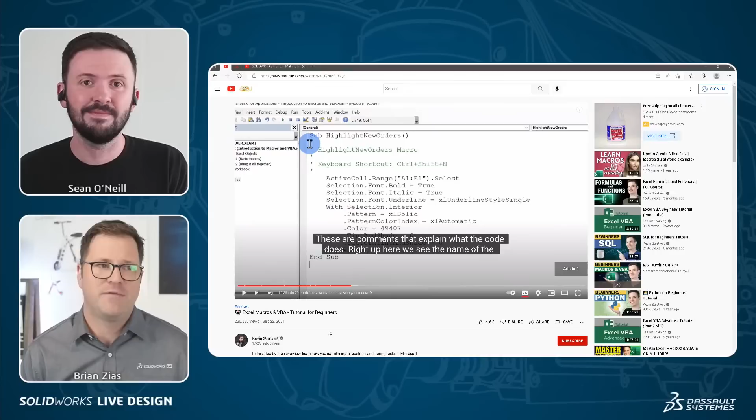And you and I were talking a little bit yesterday, you could use VB.NET, you could use C#, C++, I believe, but the majority of us being maybe new to this or not computer science majors, we're mechanical engineers, Visual Basic should be approachable. So everything you're going to cover today, and you recommend people start with Visual Basic, VBA, Visual Basic for Applications.

100%. Quick shout out to this channel. If you have no coding experience at all, and you're like, okay, I get it, Sean, I'll start with VBA, I would still recommend just trying some things in Excel. This is less than an hour of your time. Just YouTube this video: Excel macros and VBA tutorial for beginners by Kevin Stratvert. He has a lot of videos on VBA that are Excel based.

It's segmented out, but even just doing simple things like mathematical operations and working with strings, basically groups of text, will get you in a very simple interface. It's just cells on a sheet, right? It'll give you a much cleaner way forward into working with the SOLIDWORKS API. So if you have no coding experience, start there.

You talked, Brian, about how do I know which API to call? There's a variety of methods. One way, and we'll look at this in a bit today, is what's called the macro recorder. Now, the macro recorder is not foolproof. It doesn't understand intent, but in certain cases, if you record a macro, which essentially means you press record and you do something in SOLIDWORKS, let's say you select a plane, make a sketch, extrude a cylinder, you press stop, and then you review the code.

All right, let's see. Okay. Sorry to shift it out there. All right, so I will make a new macro. First thing it's going to do is ask me where to put it. So I've made a folder here, and you'll see the macro file extension is SWP. SOLIDWORKS VBA macros are always going to be appended by SWP. So I'll go in here into my test folder, and I'll just name this one System Options.

Okay, so that's popped up here. I'm going to drag that over to my primary so you guys can all see. So a couple things just to start. You'll see it basically gives you this little bit of placeholder text. So it says dim SWApp as object, which we'll talk about. And then sub main, a little bit of text in here, and then end sub.

So essentially, just think of sub right now, especially if you're not looking to be a master programmer in the next half hour, as the place where the action happens. Basically any code that's going to run is going to run within sub main and end sub. So anything in here is what's going to run.

What we have up here is dim, which is basically saying, okay, this is a variable. Variables are things where we're holding something in memory. It could be a number. It could be the number 26. It could be a string of text, a word, right? It could be the word SOLIDWORKS or the name Sean.

So these are basically just ways of saying, okay, computer, keep this in mind. I'm going to store something in memory that is this kind of thing. In this case, it's an object, or in other cases, it's an integer or a string, right? So right off the bat, I've done nothing but press file new, and we get this text.

So I went into tools options. I speculated there are a few options you might want to turn on or off based on your preferences. But how do you know which calls match which options?

So let's take a look at that. The best way I can answer that is just by going into Google, and here what I'll do is I'll say system options, to take a cue from earlier, system options SOLIDWORKS API. Just put SOLIDWORKS API on the back of everything you want to find. Yeah, you just got to append it front or back, either way.

It's fine, but really what I'm doing there is I'm typically segmenting to the API help in my search results. So you can see here, even in Google, you can see help.solidworks.com English API. I'm always looking for that API appendage, so I know it's not just system options explainers for the average user. Okay, so click on that.

Couple things here, we'll get into this in a second. What I'm usually doing before I do anything, because the search results are Google's algorithm, it's coming up with a particular year. Try to go to your particular year of SOLIDWORKS. So if you're still running 2021, you can go to 2021.

The reason why I say that is because there tend to be new API calls released with new versions. Not always - oftentimes they can proliferate for 12, 13 versions at a time before they're changed. The reason why they're usually changed is because of a change in the software.

So for example, what's new - we're releasing a ton of new content for What's New 2023. If, let's say, Boss Extrude changed in some way, there was a new option added to Boss Extrude, it probably has a new API call. Now it's not to say necessarily the old API call won't work, but it needs a new API call for feature extrusion to accommodate that new functionality.

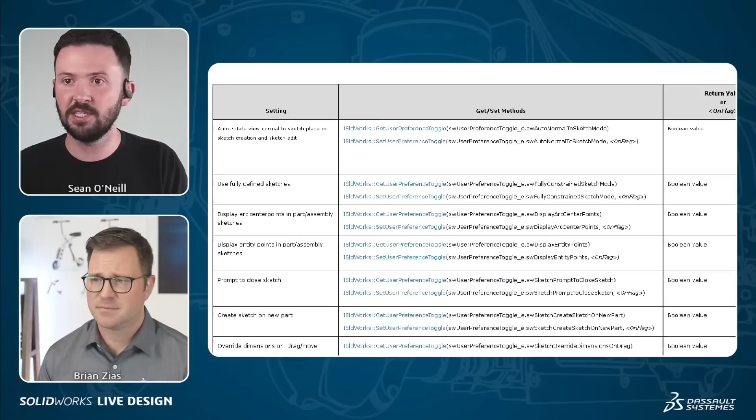And then what it also does is, you can see that each one of these, for the checkboxes, you'll always see it's called - I'll zoom in so you can see a little easier - it's always called get or set user preference toggle. It's a toggle, right? It's a checkbox.

So for numeric values, you would expect to not see a toggle. For example, maximum number of recent documents shown, that's not going to be a toggle - it's going to be an integer. So you want to make sure the type, Boolean, integer, string, you have to keep that correct. You can't pass a string to this toggle button.

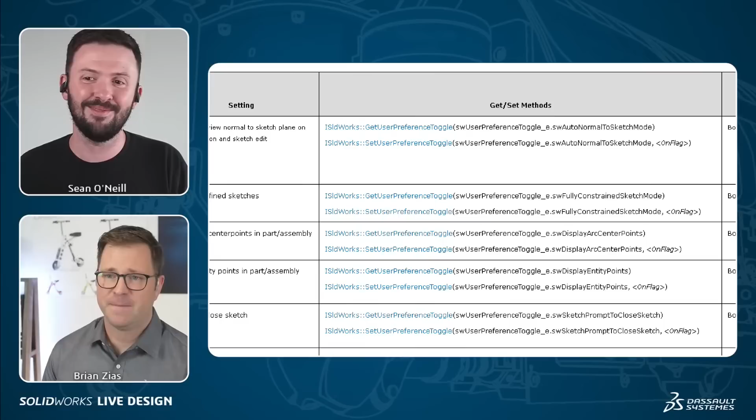It'll fail. When you run it, nothing catastrophic is going to happen, but you should get used to the API compiler, more so just telling you that something's gone a little bit wrong. What is the colon? I can see it looks like a command - get user preference, blah blah blah. Great, that's like a function you can call.

SOLIDWORKS colon - is that a VBA convention? What does that signify? It's a great question because I think it brings an earlier point full circle. If we look at our API code, you'll see this matches through one letter. It doesn't show up when you type out these library and object mappings, but you'll see this says ISldWorks here, where I'm cursoring, and this one just says SLDWorks. So SLDWorks, SLDWorks, and then SLDWorks. Essentially, that's where this command lives.

So it lives at that level of what we call the object hierarchy. Essentially, these do make sense if you think about it this way. So here, in this case, SLDWorks - that's just the SOLIDWORKS application. So we're changing the system options of the SOLIDWORKS application. We aren't changing this per part, or per part template, or per assembly template. This is changing it globally in terms of how this operation happens when you sketch.

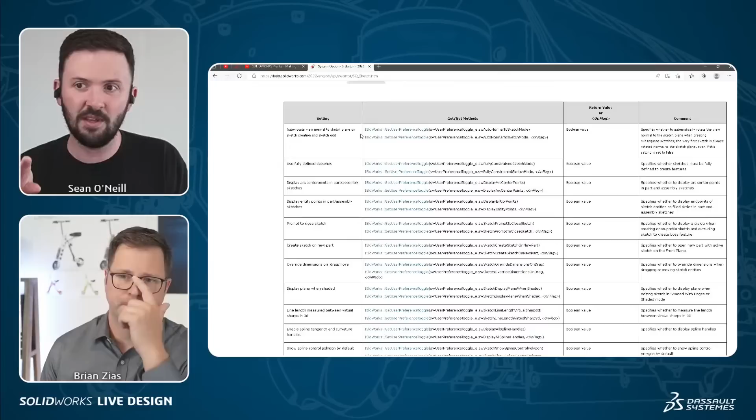So you probably need to know where that command lives, because you might need to call SLDWorks dot part or something to call the right function at the right library.

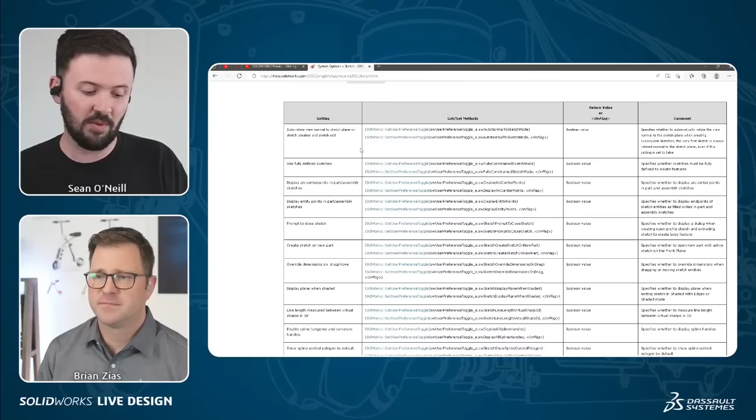Yeah, so essentially you would first establish what we had just done before, which in this case is we've established that there is going to be a SLDWorks style object. It's going to hold the application. Later we're going to assign it explicitly here. But oftentimes, if it's something that deals with a model or some sort of SOLIDWORKS document, we will also see - and again this name doesn't really matter, if you say dim's just telling you it's a variable, you'll always say dim for anything - SW model, that's pretty common syntax.

I used to say in the SOLIDWORKS API course, you can name this flamingos. Doesn't matter. It's just a name that you like, and it has to obey syntax rules in VBA. But try to make your variable names something that makes sense.

But what you'll most commonly see in terms of declaration statements is you'll see SLDWorks again cascading hierarchically, and then you'll see ModelDoc2. I'm thinking of it like you're initializing your variables, so as you call them later, you're setting it to your current application, current model document that you've opened. Exactly, yes, that's exactly true.

So when you think about libraries, you're pretty much saying, I want this sort of area of the library, I want this area of the library as well. I want to be able to work with SOLIDWORKS, and I also want to later work with a model of some kind. Now this won't crash if I run it, but it won't necessarily do anything either, even if I don't use this variable anywhere, because I haven't assigned it to any sort of model. Nothing bad's going to happen, but nothing tangible will happen either.

You say you haven't taken the API course, but I'm not sure I believe you. No, I swear I haven't. Well, I taught it, but I've never taken it. No, I'm just kidding. Well, oh, that would be great. No one has ever done that in the history of application engineering, you know, in the SOLIDWORKS channel.

Yeah, it is true. Sometimes you'll do that, like auto updating sketch entities, for example. That's one thing. Because if you're adding a lot of sketch entities at once, you don't want it updating every single time you do something, because it just delays the running of the macro, and it can make the screen flicker and all sorts of weird stuff.

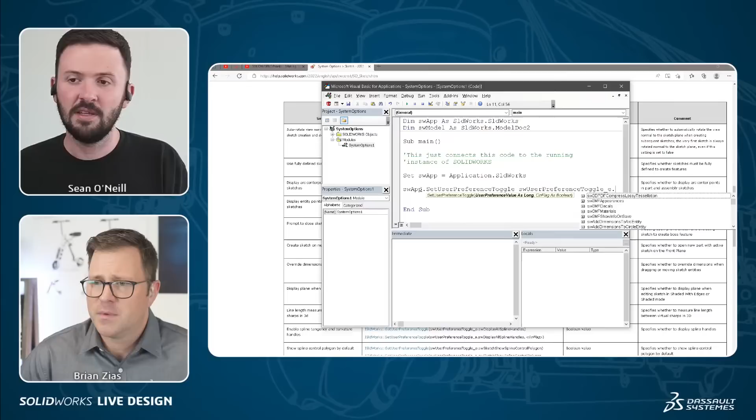Right. So here, what I'm showing is, just to pause here, I copied in the string as it was in the help, which looks similar to this, but different. The part that I deleted out, if you see here, it's highlighted: ISldWorks set user preference toggle. The part that I deleted out was ISldWorks, because that's just referencing a library that you have to connect to. And you've already initialized that.

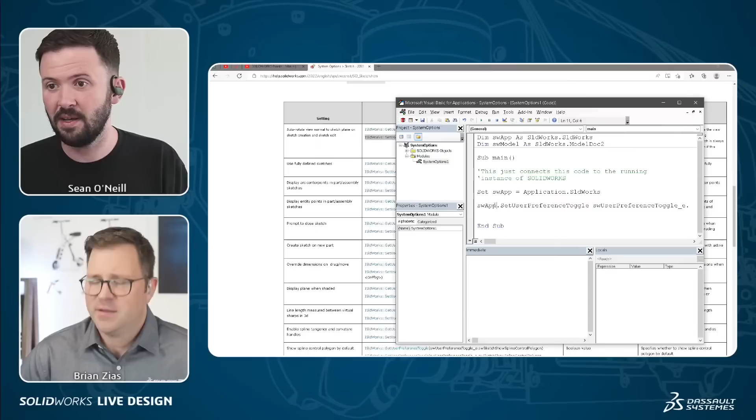Yeah, I already initialized that. I already set it equal to my running instance of SolidWorks, right? Okay. So I'm saying swApp.SetUserPreferenceToggle. So it's set to my running instance of SolidWorks, and then a space.

And then I have that same snippet of text, swUserPreferenceToggle_e, which stands for enumeration, which essentially you could think of as like a list of different values that you can connect to, numerically or by their name. So in this case, because I'm a human being and I like to see text, I'll do sw auto normal. And how did I know that? Because I looked at the help, right?

SW normal. I didn't realize, so it's real time giving you kind of the next level of that function, or whatever it wants or expects next in the syntax. Exactly. That's so cool. So this is called IntelliSense. So this drop down where after you type the period, it starts basically predicting or giving you a filtering of options or possibilities.

This is called IntelliSense. So with IntelliSense, I can just double click or press tab, and I don't actually even have to type the rest of the command correctly. I'm basically just typing that in, nice. sw auto normal to sketch mode.

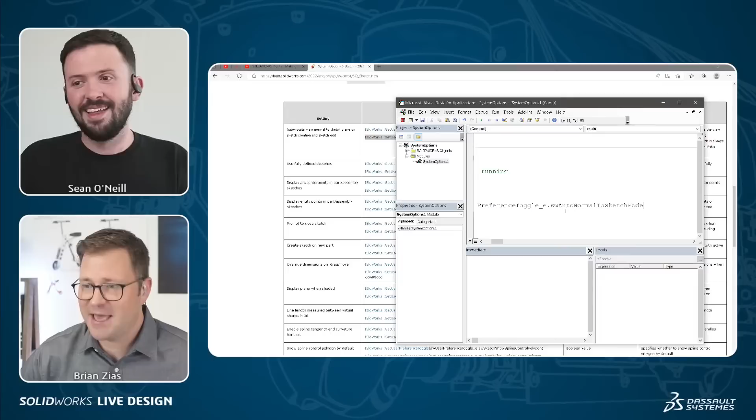Okay, and dumb question. I mean, that's so helpful. But I'm thinking, is this case sensitive? Like if I didn't use that, would I have to know ANTSM? I think it would just correct it, like when you did a space. Oh, okay, all right. Yeah, it would see that the characters are the same, and then it would basically map to it.

So if you do a comma, you'll see that it's expecting that second argument, which again we saw in the help, the on flag, which is Boolean. Yeah, Boolean, true for checked, false for not. I'll say true. This is the only one I'll do now, and again, a good practice, I'll just comment auto rotate, and I'll just do an ellipsis here, so we don't have to type the whole thing. But you want to do that so that people actually know later what it is.

You might want to save this, so I'll do that, save, and then what I'll do is I will run it. So you can always just press F5 on your keyboard, or press the play button. Now, something happened, but we didn't see it happen. Yeah, we didn't see it happen, right?

To your point earlier, Brian, I think you mentioned this, you can with message boxes, right? Message boxes are a very common early phase programming exercise. You can, if you want, give a message box to the user to tell them that it has succeeded in doing what it has been set to do. But in this case, and in all cases where you don't do stuff like that, it's not going to tell you. The only way you can do it is in an evidence-based way, right?

You go back to options. I go back to sketch, and it is checked, right? We didn't see me do that. It was unchecked, and now it's checked. So you could build a message box in your code, just be like message box: are you Sean or Brian? Button Sean, button Brian. If Brian, set it to false, if Sean, set it to true. And so that's where you get to some really interesting stuff.

So basically, this is not in the API help because it's not an API command. There are specific message boxes you could think of. But this is just VBA. So if I just say hello, right, and then I press play, hello. So you can call message boxes and interrogate or whatever the word is and get answers.

Can you actually build? I remember when I was playing with Visual Basic 6 in middle school, you could build forms with text boxes and combo fields and drop downs. Can you do that in VBA? Yes. I know there's so much to get into in this topic.

We have like 10 minutes left, man. I'm sorry I'm sidetracking you. No, it's okay. I hope you guys are enjoying this. I would talk about this for hours, and I'll share a post if any of you guys want to talk about it more, because I love it.

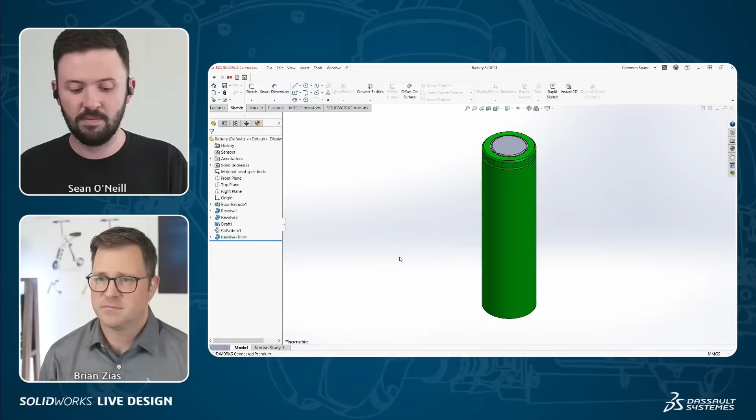Let me show you an example. I'm going to skip ahead a little bit. So I'm going to go and open this battery. I'll show you a bunch of stuff in this example that I hope you'll find helpful. So this is a very simple battery. You figure, okay, there are going to be some holders on the top. You'll do a battery pack assembly, right? And maybe you want to pattern that, or you want to do a copy with mates with it, right?

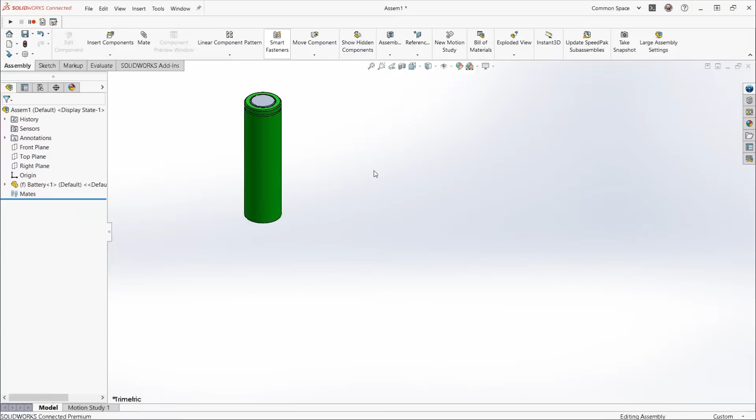So I'll go ahead and do make assembly from part. Assembly template is on my other screen. Double click that. And I'll do a green check just to get it at the origin kind of relationship. All right, so I have that. What I'll actually do just to fast forward, because I have the assembly there and there was no API involved with this, is the whole set. So let me just open that.

All right, so let's say I'm at the phase where I actually just want to make my full battery pack. So how would I do that? Well, let's say I wanted to do it with patterning. I could do a linear component pattern, and of course that's an assembly feature, and I can do my directions. So let me do that with the macro recorder.

So I've turned on my macro toolbar, which you can customize through the customize menu, and I'm going to do record. All right, so I'm recording. Again, nothing happens, there's no dialogue, but it is recording my steps as much as it can. So I'm going to go to linear component pattern. So look at all these options. This is not what I want to write out. If I have to specify each and every one of these, that's such a pain.

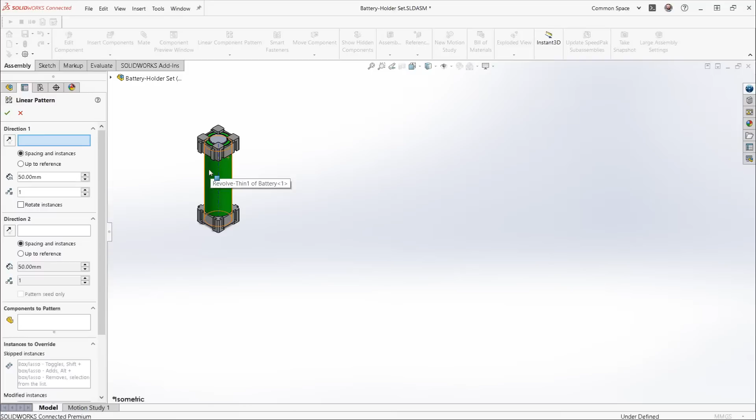So in these cases, even if I know the call for linear pattern, if I can Google it, if I know it by heart, I don't want to write it all out. So sometimes I'll use the macro recorder not because I'm lazy, but I'm trying to be efficient. So direction 1, say I use this face here. Haven't specified instances yet. It's just 1, so no preview.

Let's say I know it is 20.2. All right, 20.2 gets it connecting directly. And again, you might want to do copy with mates in this example, but let's do it like this for now. And then direction 2, I'll use this face, so the arrows are pointing the correct way. And let's just punch in some arbitrary values. So here I'll say 4, and here I will say 6. No component to pattern yet, so we don't have a preview.

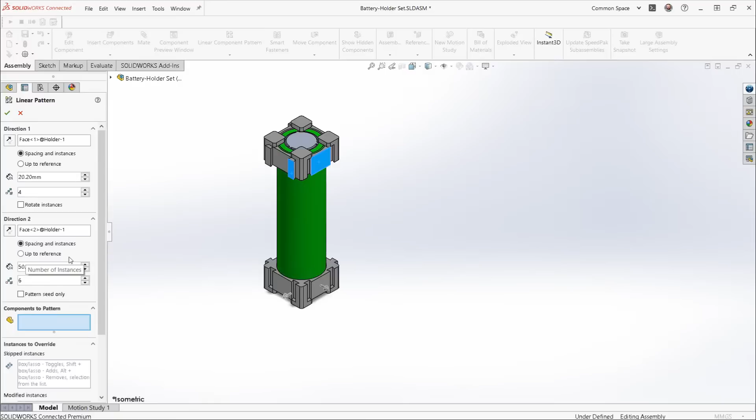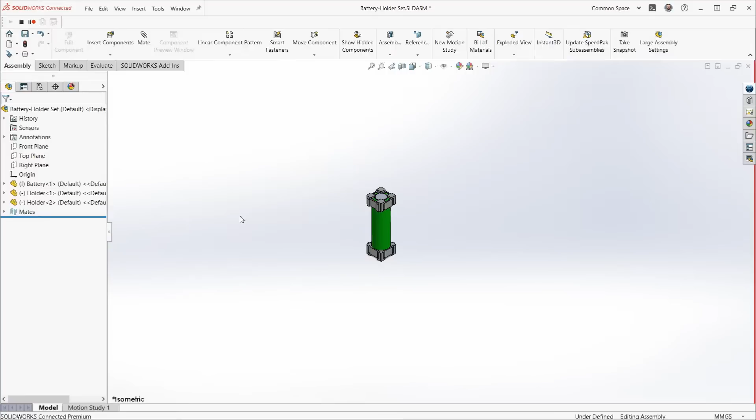But as soon as I go to my tree, I probably should have done this at the top level, by the way. Okay, green check. Well, actually, let's skip this step. You're trying to go too quickly, Brian. So let's put this into a higher level assembly, because the patterning doesn't work with that particular number, because it's spacing the components in a different way. So do make assembly from assembly. Now we'll put the sub-assembly into a higher level assembly for the actual battery pack. Apologies for missing that step.

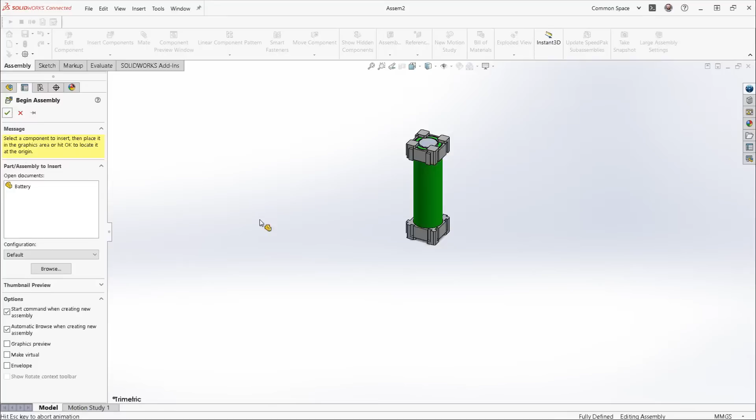No, it makes sense. And when you're doing the recorder, is it only recording the parameters that you're changing? So if you didn't go in and change the number of instances or the variable length, it wouldn't record that, would it? So you have to change it to record it. That is a great question.

So in terms of changing, right? So we think about SOLIDWORKS, right? There's required inputs and there are inputs that are not required. Right. So for example, I could have gone in there and just done a green check and got a successful feature creation with no direction. Sure. Nothing specified. Exactly.

But the API is similar but different. But to your question, in the way I believe you're asking it, it will record all of those. So most of the arguments are required to be answered. The reason is because you think about a function, you think about a list of different inputs, even in this case, right? So let me just record this before I forget.

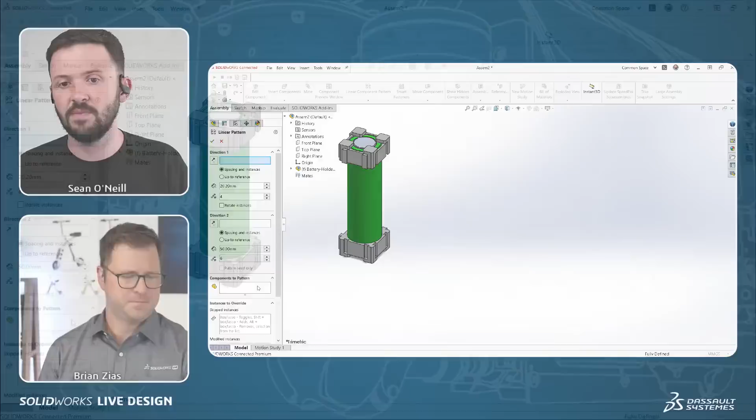So I'm going to press record again, go into linear component pattern, basically do what I just did. Okay. So first I'll do this just so you guys can see a preview. I'll do direction 1, do this face. All right, so you'll see it looks much more normal now. Direction 2, get this front face here. Okay, great. Then I'll do 20.2, which I believe was my error last time actually. And then, okay, so that looks good.

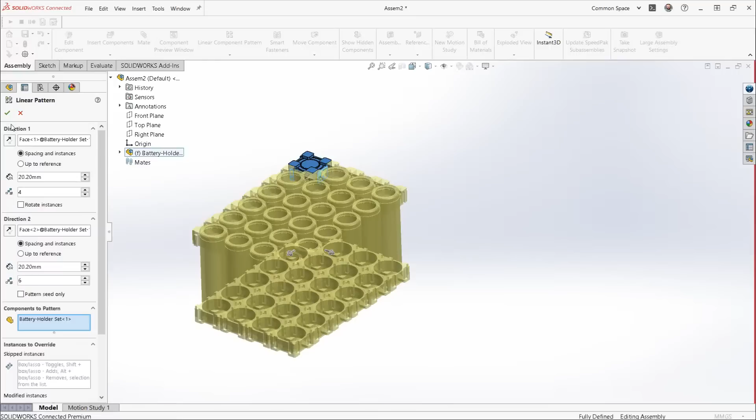Green check, but you notice even before I do green check, I haven't skipped any instances, I haven't modified any instances, I haven't checked these boxes. Yep, nothing. But in a sense, you're still telling SOLIDWORKS what to do. You think about it that way, I'm still specifying that you're not going to skip any instances, right? Yeah, it's kind of a null parameter. Yeah, exactly. So even though we don't think of it that way because we don't have to, we disregard it, I think most of us anyway. We're still giving an instruction to SOLIDWORKS to not do anything.

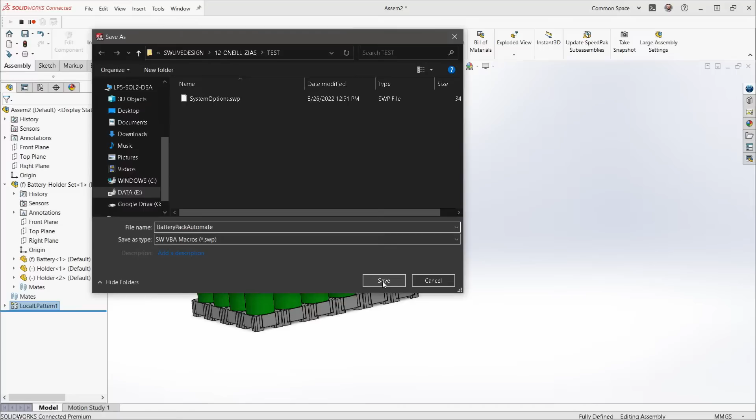So if I say green check here, all right, so we have that. We have the battery pack. Great. I'll say stop. All right, so now it's going to ask me where to save that. I'll just say battery pack automate. All right, so basically it's very simple. Automates a pattern. So I say save. Okay, cool. Now I'm going to go ahead and edit that. So we went to edit. All right, so here's what we came up with. So I'm going to go full screen.

So you're going to see how the API thinks in a way. So basically, it's recorded all of this data. So we see some similar calls, right? It's basically establishing that we have SOLIDWORKS the application, right? This is new, right? It's setting the part variable, which you'll see similar to how I did SW model. It's doing dim part, designated part, and it's saying SWApp.ActiveDoc. So that's basically the document that you have up on your screen. Now, this is a great way to just get familiar with basic stuff. Just record something and actually observe what it does. This call is super common, right?

So anytime your intent as a user or someone running a macro is just to run it on the current document, it's probably going to be using this because that's the document that's in the foreground. Understood, right? For example, when you press the boss extrude icon as a user, and you're in a part, it's going to start a boss extrude in that part. It's a very similar idea when you specify this particular line. So you're saying in the application, the active doc, I want to run this operation there.

So then what it's doing is it's saying, okay, select by ID, battery holder. That was the component that I selected to be patterned. So that's how I know that. And then it does this weird thing where it says select by ray. And you can see these coordinate arguments. Yeah. What that actually is, it's specifying the faces that I selected for the pattern direction. So it's saying in the model space, basically select in this particular area where my cursor was. Not the model face ID, it's the actual location of your mouse. Yes. So it doesn't understand why I did that. It just knows that I did it.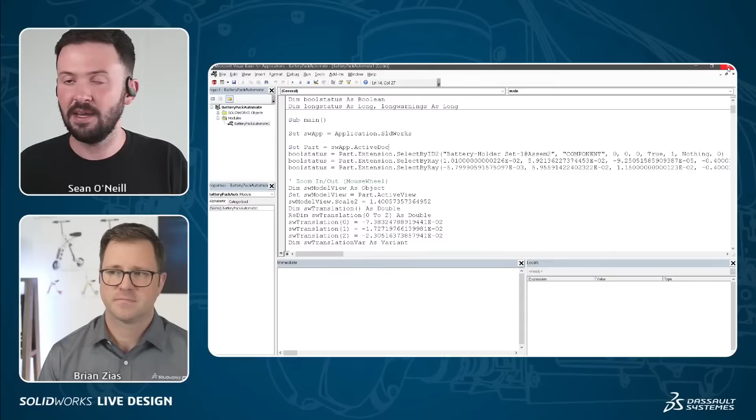Right. Which is interesting. So in cases like these, a really good piece of advice I can give you is, instead of doing it that way, and I'll just suppress it here, what I would do in a case like this, if you're going to record it, is you can go record, right? Go to linear component pattern. And what's something that's a bit more standard that I can use? Planes. Right? Yeah, I can use planes.

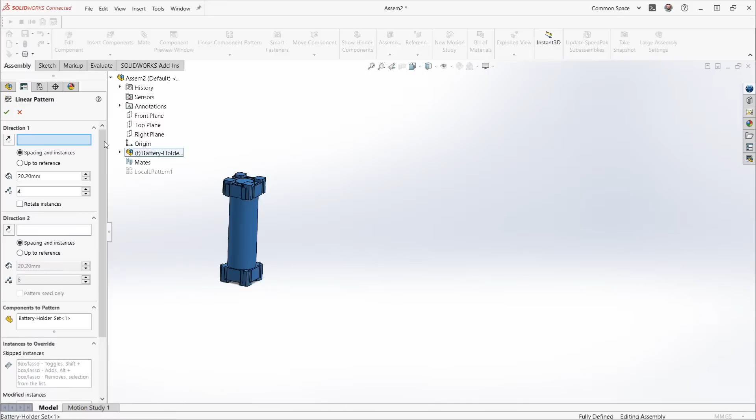So planes are available to be used for direction. So if I say right plane, same effect, right? And then I say front plane, same effect, right? And this does make a difference in terms of portability, absolutely, right? Because each assembly has a system-defined plane.

So basically, if I'm saying check here, then I stop it, and then I go here and I say, okay, I'll keep the name macro 2 just because we're running low on time, and then I go to edit, macro 2, open. You'll see it's much more portable in that way. The other thing you'll see is it's doing a lot down here in terms of making that feature occur. So it's capturing a lot of zooming in and zooming out. I'm just kind of going past it.

One thing you'll find is that it's very sensitive to your cursor feedback. So you'll probably want to delete some of this. What I often do if I'm not sure about deleting recorded macro code is I just comment it out. So it looks like it made a comment for you. I mean, this is all just, as I'm scrolling through it, manipulating the graphics canvas. Yeah. Which you don't need. The API doesn't need to do that to run.

No, and it just doesn't know, right? So I know enough to know this is pretty safe to delete, but it did capture that input from a recording, and you don't need it. So I would always clean this up. Basically, if you're not sure, always comment it out, because if something breaks and you've deleted it and you don't know what it was doing, that's not good. Yeah. Especially for longer macros that may be downloaded from the forums and you edited to fit your needs.

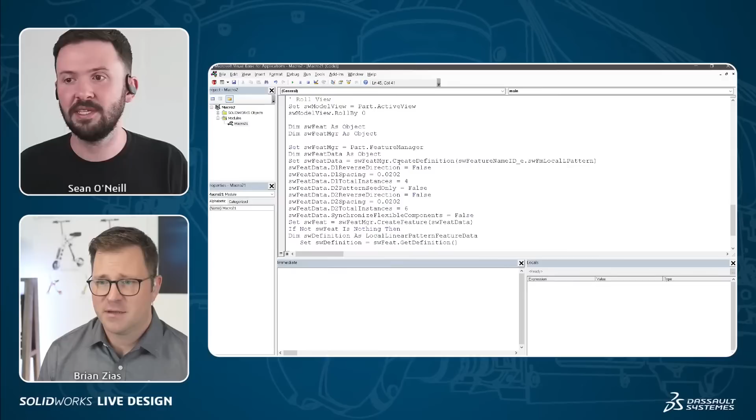So where's the actual linear pattern then? The actual linear pattern's here. So you'll see, it's pretty readable. So create definition, swFm local L pattern. And you set it as a variable there, so you don't have to keep retyping that every single time. You're just saying, set my current SOLIDWORKS feature data as a variable to this command, and then I can call it like a shortcut. Yep.

And you'll see here D1 total instances. We can Google all of these and research what they actually are, but we can kind of guess, right? Like direction 1 total instances was 4. Direction 2 total instances was 6.

Now we're at the top of the hour, so I'm just going to try to do something cool and very quick, because if you've never done this, it's like a light bulb moment. Brian, you asked, what do you do? I can make a form, right? And I can establish an interface. Yeah, I can make an interface for a user, for myself even. So if I do insert user form, let's go back to macro, user form.

Okay. So go to my tools. Let's grab that. Oh, sorry, it's on the other screen. I was like, where is my toolbox? There you go. So the toolbox, this is a form builder. So this is actually, I hope, a lot easier than you thought. Basically, you're clicking and then you're dragging to make a command box. It's like making a data card. Yeah, anyone who's used PDM, you know that.

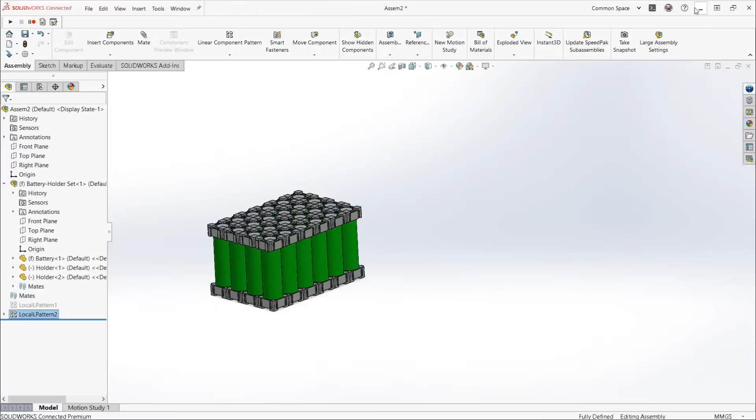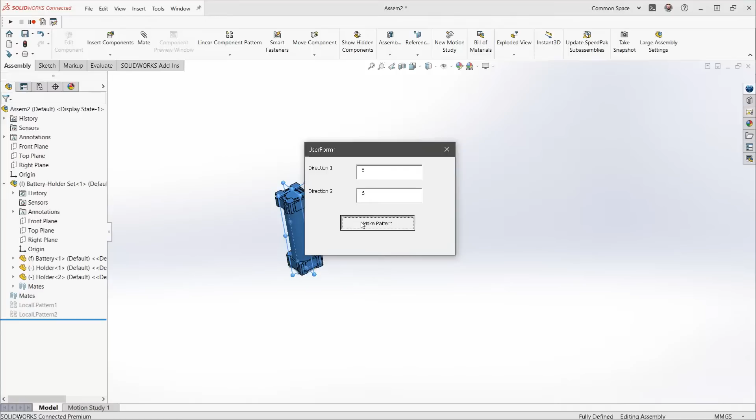So let me minimize this. I'm going to suppress this local pattern because I don't want to have patterns all over the place, and you won't even know what happened. Okay. So I'll just go to a pretty isometric view. Then I'll go back here, and then I will run my macro. Cool. User form pops up. So we'll say 5, say 6, make pattern. No way. Look at that. You didn't even test it and it worked. That is a fantastic example, Sean.

Yeah, so it switched back, and you'll see we're right back in our ugly view because we didn't delete out all that view nonsense. So you want to clean that code up, maybe have it go back to an isometric view for the user. Zoom to fit is a common one at the end. ZoomToFit2 is the most up-to-date one. But yeah, this gets you there.

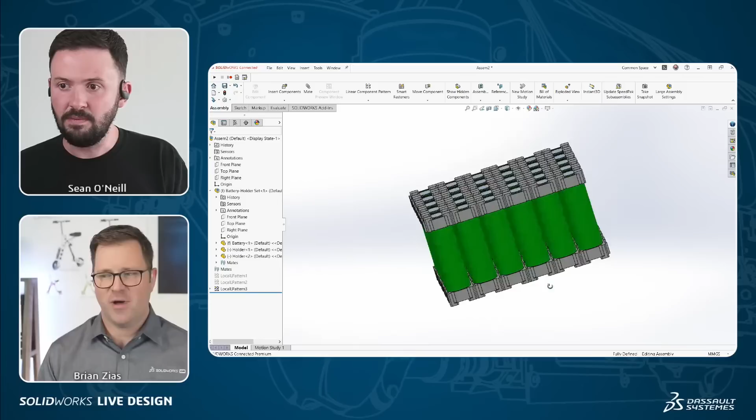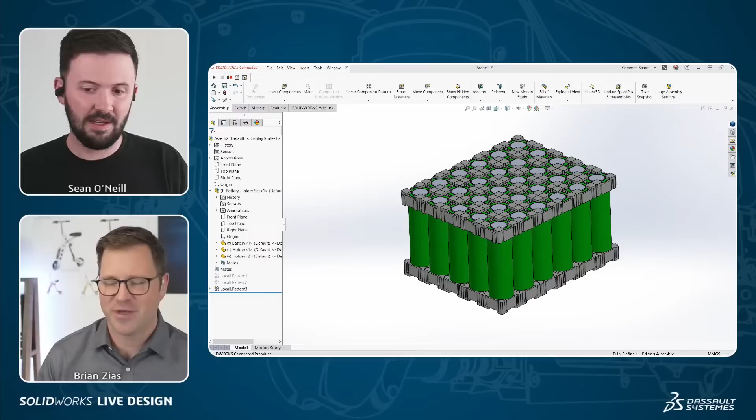But I'm definitely feeling like I have an understanding of it, and I also am feeling like I'd want to maybe learn some VBA to truly get into this. Refresh myself on just how that code works, but also it's not that complicated. It feels really, really familiar. No, it's really not that bad. I think that's definitely my ideal starting point there.

And let me just close this out. So one other example I wanted to show you guys. I should have done a close all there, save a little bit more time.

One example I wanted to show you before we depart relates to a question in the chat. You can see in the top left corner this is SOLIDWORKS Connected, and I'm running all the macros there. It's pretty much the same macro code between SOLIDWORKS Desktop, which doesn't have PLM included, and Connected, which does.

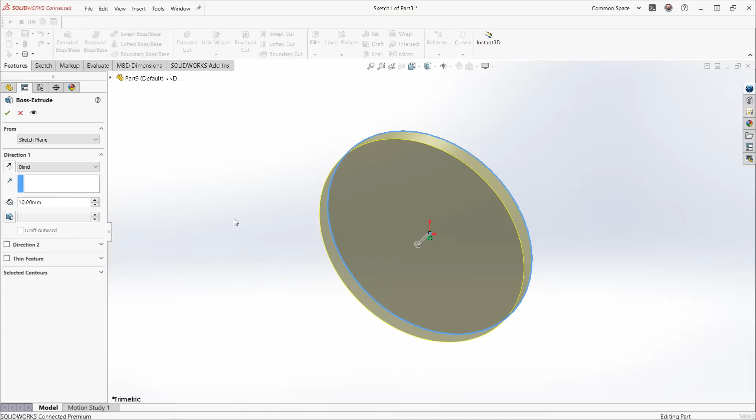If I make a sketch, let's do my version of Hello World, which is just a hockey puck, then do the extrude, green check, just to get some geometry in there. There probably will be a growing amount of these, but there are API calls specifically for 3D Experience SOLIDWORKS already in the SOLIDWORKS API. So if I go to Play or Run Macro, that's going to ask me to run a specific macro.

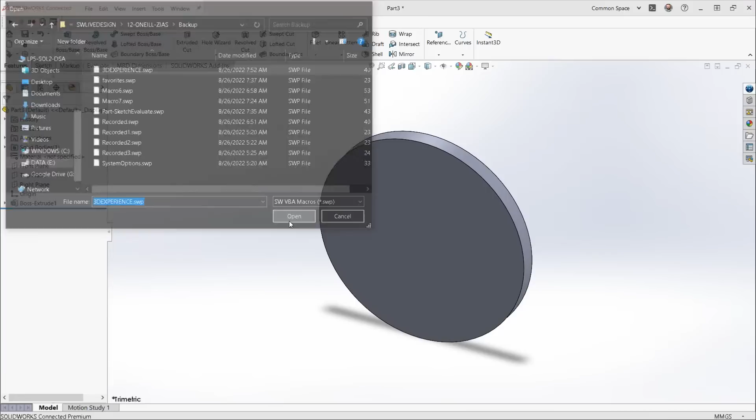If I go to my backup folder, I have one saved. This is actually just the one you'll find in the API help. I haven't changed it any, but just to show you an example, there you go. I didn't click anything to do that, it's just saving. So yeah, you can run some of the 3D Experience SOLIDWORKS specific things, like save to the platform. I'm trying to think what else there is.

What about save and open? Save and open are two common ones, right? More API calls will be coming, I'm sure of it. But yeah, this example is directly from the help, so you guys can find that.

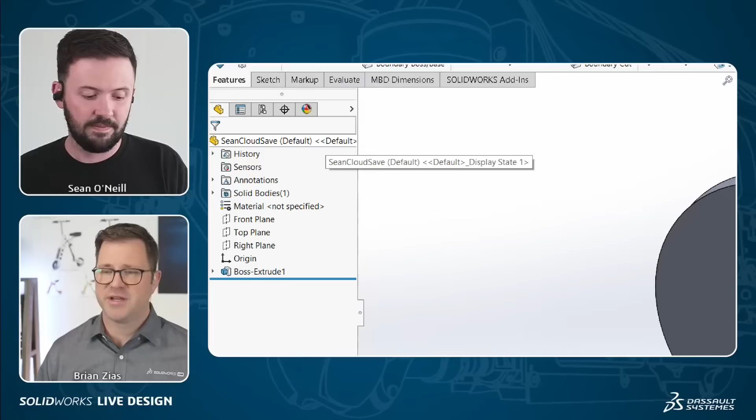If you're using, I don't know, Maker Edition, even try that out. You'll see I specified my file name here, Sean Cloud Save, and my part name here is Sean Cloud Save. That's awesome. So 3D Experience SOLIDWORKS, which is the version we have for makers, includes API, and you can write it to your heart's content, just like before. So that's good to know. And there's even API calls that we'll be expanding.

That's awesome. Okay, well Sean, I hate to cut it short. I feel like we could go twice as long here. Yeah, we're literally seeing the top of a giant iceberg of what you can accomplish.

Yes, and I know there are so many cool examples out there, but let's just summarize what we learned. We talked about what the API is, especially relative to other automation tools out there: configurations, Excel-based design tables, even using things like DriveWorks Express, and understanding where the API is and when you need to pull out that toolbox. I think that makes a lot of sense.

And then we looked in that toolbox a little bit and saw Visual Basic for Applications. It's built right in, and we covered how to navigate that and get started using recording, as well as the help, or just using Google, searching SOLIDWORKS API and your feature name or whatever you're getting into.

The other thing I wanted to touch on before we wrapped up is how you can actually get in and learn more. We've already talked about your local reseller, you can do the SOLIDWORKS API class. A lot of local resellers also offer services and can help you program your first macro, and maybe you can look over their shoulder. Our VARs are awesome for that kind of flexibility and helping you in the way you need. There's also e-learning, so you can go to mysolidworks.com and enroll in the API e-learning.

The last thing is the forums, which we've moved over to SWYM communities. Like, where would I go to ask questions of Deepak or you or other community members, or answer them if I have some time to give back?

Sure, let's take a look at that, I'll pull that up here. I think this will also help Bloody Cub, great name - just bought 3D Experience SOLIDWORKS, can't access it. Getting started for the first time can be a little daunting. You've got to start off by hooking up to the SOLIDWORKS user forum community on our platform, and there's a 3D Experience SOLIDWORKS place you can go to get all the guidance you need to get started.